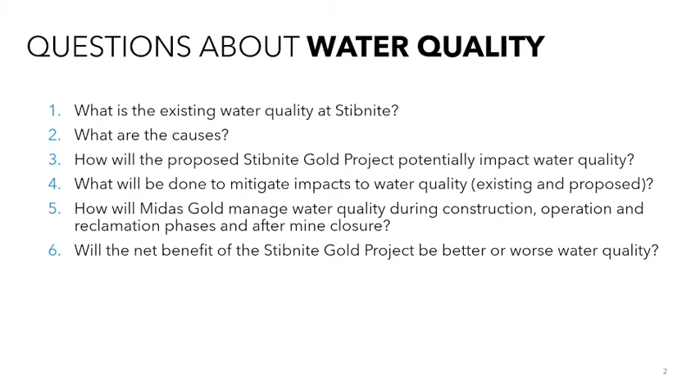We'll have some good illustrations to demonstrate those concepts. And then we'll speak a little bit to the net benefits of the Stibnite Gold Project. Again, some of these data are still being worked on and being updated. But we very definitely have some goals with regard to improving water quality at Stibnite.

So I've spoken a little bit to this, but I'll just buzz through these agenda items. I'm just going to do a very brief intro, and then Austin will talk about baseline surface and groundwater quality, and then speak to the geochemical characterization, how we've prepared or gathered data for these predictive models that estimate what our water quality may be during various phases of the Stibnite Gold Project, and how we've come to those conclusions.

And we'll also speak about water management objectives. This will get into Doug's portion of the presentation. We very definitely want to protect and improve water quality during all phases of the mine, and in post closure.

So there are various topics that Doug will speak to about water treatment, and how we arrived at the proposed water treatment approach included in the draft EIS. This is a water treatment and water management concept applicable to all alternatives. You'll note that in the draft EIS, water treatment is associated with alternative 2, the Mod Pro, the refined pro. But these concepts are applicable to all alternatives in the draft EIS, although they were not applied in that document, but they do have the potential to be.

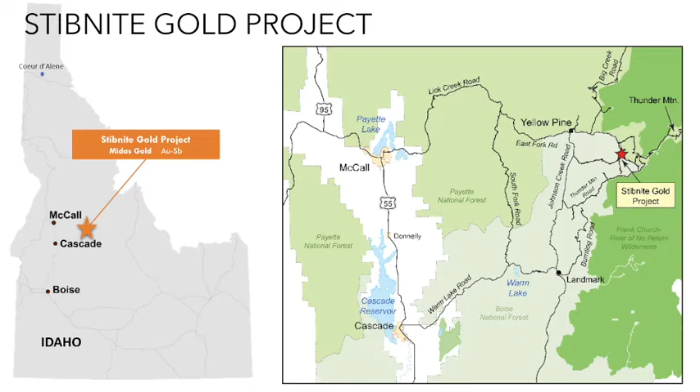It's been the location of a lot of activity, and there's still a sizable resource there that is the target of the Stibnite Gold Project. So that's our general location.

The initial plan of operations, or the plan of restoration and operations - because it has so many components of reclamation and ecological restoration, hence the name - was submitted back in September of 2016.

As you may recall, there was a modification of the proposed action submitted in May of 2019, the Mod Pro, included in the draft EIS as alternative 2. The Pro was also included as alternative 1, but the Mod Pro was very much a refinement to the Pro, with reduced environmental impacts, etc.

But what we did want to maintain with that Mod Pro, even though it was a refinement of the Pro, is all of the restoration objectives included in the original Pro, including restoring salmon migration into the upper east fork of the south fork of the Salmon River. You'll see the blockage in the photo on the cover of the Pro here, the Yellow Pine Pit Lake and the cascade coming into its upgradient edge, which has served as a blockage to anadromous fish passage since 1938.

And of course, there's also socioeconomic benefits to the Stibnite Gold Project - a lot of jobs for Idahoans. One of the mineral resources at Stibnite is antimony, the namesake of Stibnite, the mineral that contains antimony. It is a critical mineral, one that we're very import reliant on. So this would be the only domestically mined source of antimony in the United States.

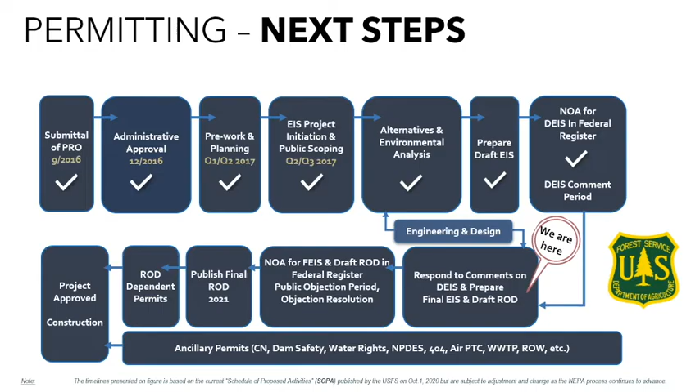So with that, we're going to transition here to Austin and his discussion about water quality. So Austin, take it away.

Thanks for that lead in, Dale. That's a good overview. I'm going to be talking today about water quality, geochemistry and geochemical characterization, as well as existing water quality on site and some of the things influencing that, including naturally occurring mineralization and legacy mining activities.

We have a slide here to get us kicked off - acid rock drainage. Acid rock drainage is a big issue of concern for a lot of hard rock mining projects, and this is associated with dissolution of sulfide minerals, which create acid, and these things tend to accelerate the release of metals into surface and groundwaters.

Now, we don't really think that this is going to be an issue at Stibnite, and I'll be presenting some data that speaks to that a little bit later on. A key takeaway here is that even after almost 100 years of mining activities on site, there's really very little evidence for acid rock drainage occurring on the site.

In terms of water quality today on site, Midas has an extensive baseline groundwater and surface water monitoring program that's been going on since 2011. It consists of a suite of over 40 surface sites and 30 groundwater wells, which were initially sampled monthly and have subsequently been sampled quarterly for a number of years.

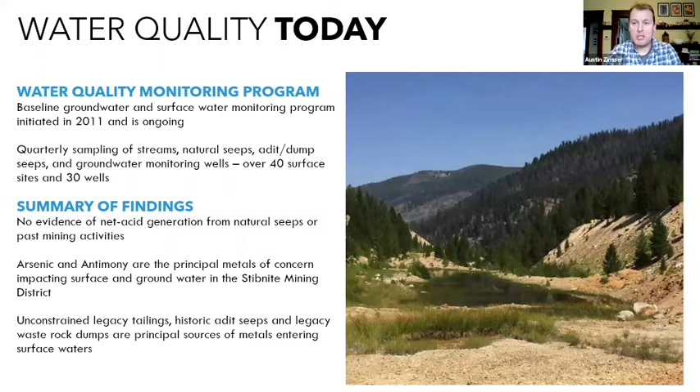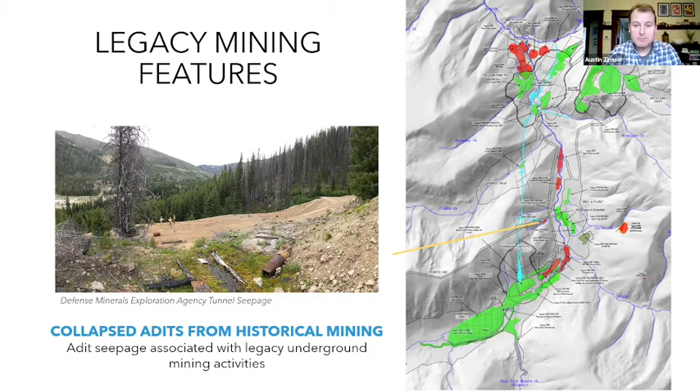We have historical adits such as the Defense Minerals Exploration Agency Tunnel, which there's a picture of on the left, and there's seepage from that adit which is potentially impacting surface water quality. And then there's also, if we can go to the next slide please,

other larger features such as this photo of the historical Bradley tailings, which were unconstrained mill tailings placed in Upper Meadow Creek Valley, which were subsequently covered with spent heap leach ore from 1970s and 1980s gold mining operations. You can see that material being covered in the historical photo. This is the large green area on the map.

Sorry, I have a cat.

But this is just an example of some of the larger legacy mining features that are known to impact surface water quality on the site.

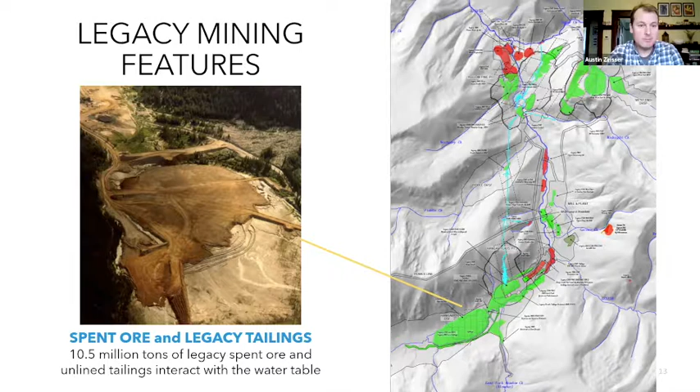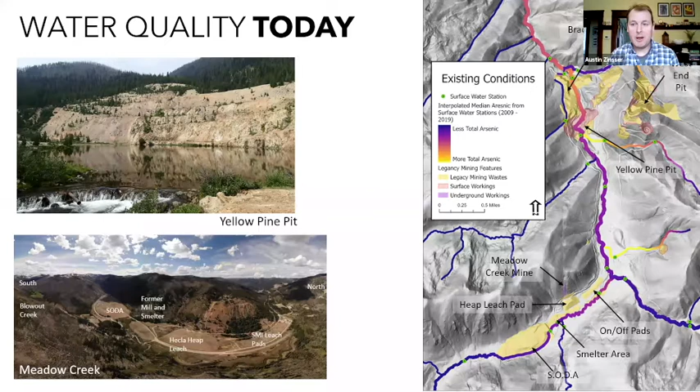Moving farther to the north, where Meadow Creek joins the East Fork, South Fork, Salmon River. The Salmon River flows through the Yellow Pine Pit, pictured in the upper left-hand corner, a historical open pit mine left from 1940s mining operations. And then down to the confluence with Sugar Creek as the river flows north and leaves the Stibnite mining district. But we're going to be looking at some graphs showing water quality of key constituents as the river flows past these legacy features.

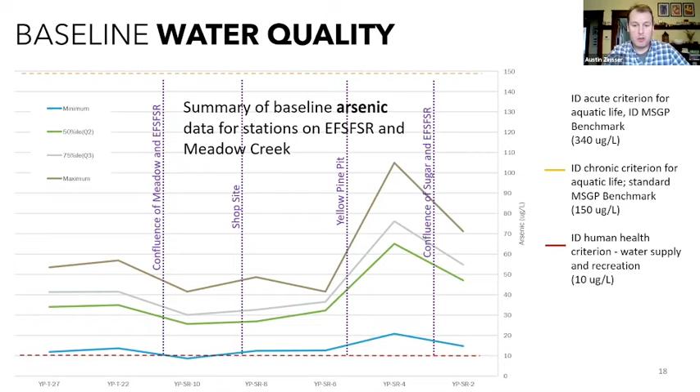There we go, a similar overall plot for antimony. We can see that higher up in the drainage, median concentrations are below the human health criteria, but they rapidly increase to exceed that as Meadow Creek flows past some of the historical mining piles, and increase steadily downstream until the confluence with Sugar Creek in the East Fork.

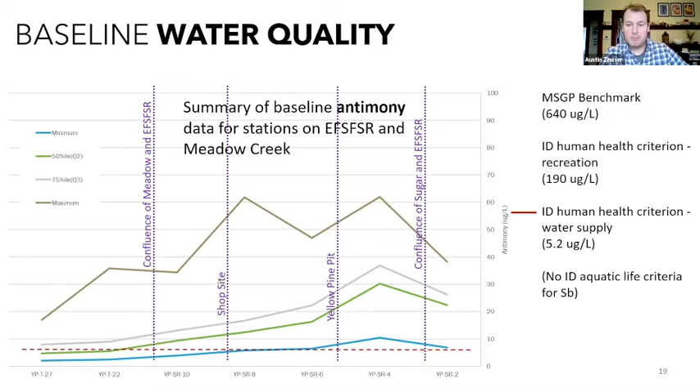The next plot shows mercury concentrations, which behave somewhat differently. Mercury generally remains below the chronic criteria for aquatic life throughout the area of the Stibnite mining district, but does increase during some periods below the confluence with Sugar Creek, and that's due to Sugar Creek draining the historical Cinnabar Mercury mining district and introducing that constituent into the surface water.

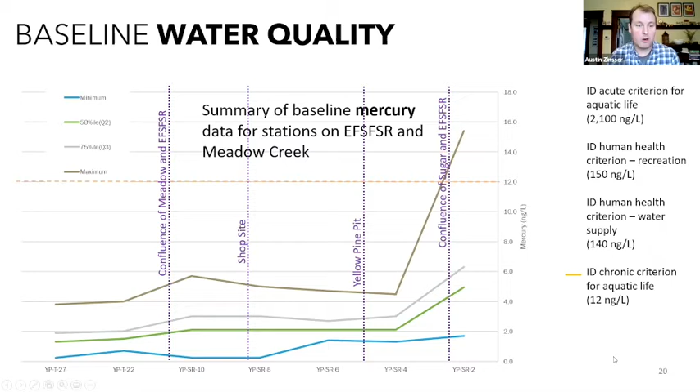So I've talked about some of the legacy mining features and how those impact surface water quality.

But another key component here is that there's a lot of naturally occurring mineralization in the Stibnite mining district. We have the three known mineral deposits targeted in the Stibnite Gold Project, but there's also a lot of other areas of elevated arsenic and antimony occurring in the district. That's displayed on this map, derived from soil, rock, and silt samples collected for exploration purposes, color-coded by arsenic concentrations. You can see that elevated arsenic occurs throughout a large portion of the district, primarily on the east side of the Meadow Creek Fault, which runs right through the Hangar Flats and Yellow Pine deposits.

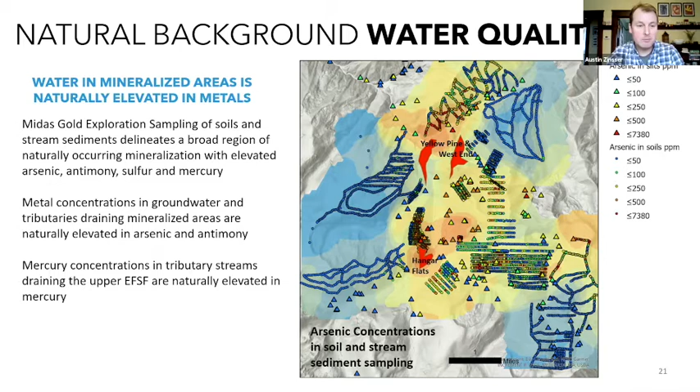So water concentrations draining mineralized areas are naturally elevated in metals. This slide shows information from a characterization study prepared for IDEQ back in the 2000s, which estimated what natural background conditions are in groundwater and seepage from mineralized areas. You can see that arsenic is for the most part consistently elevated above the human health criteria, and antimony is elevated in seepage from mineralized areas.

So both legacy mining features and naturally occurring mineralization are leading to degraded water quality in the Stibnite mining district.

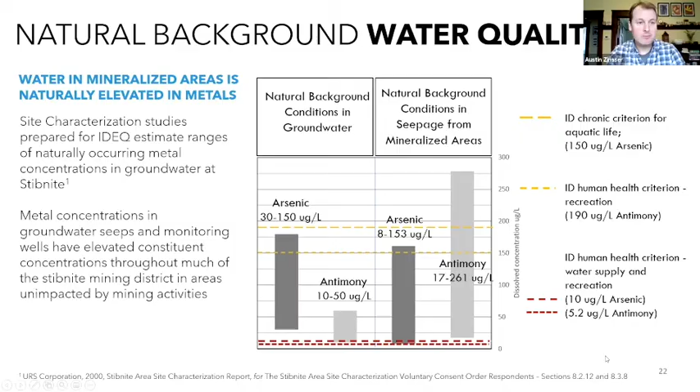So I'm going to switch gears here and talk a little bit about the geochemical characterization program and some of the work that's been done to support predictive modeling of what water quality might look like due to mining activities.

The geochemical characterization study was work being done by SRK Consulting out of Reno. I've been working with them for a number of years on sample selection and making sure samples are representative of all of the different types of geological materials we have on site.

Some of the sampling included samples of ore and development rock, as well as legacy mining wastes, material that's going to be representative of the mill process material, and then also additional samples as needed.

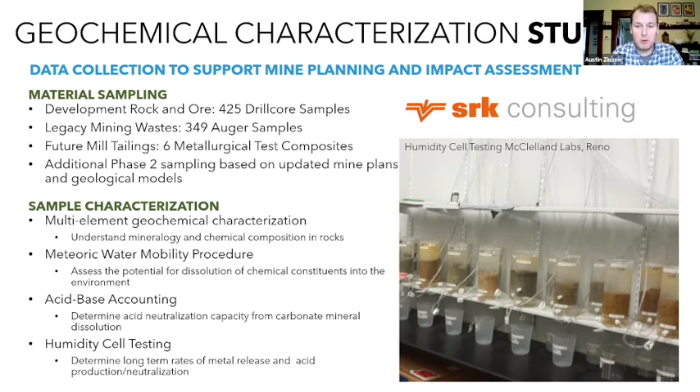The general characterization consisted of multi-element geochemical characterization to know what constituents are in our geological materials, and then some short-term leaching tests, acid-base accounting to figure out if the samples are potentially going to generate acid rock drainage or not, and also humidity cell testing, which looks at long-term dissolution rates and long-term release rates.

Basically weekly, these cells are exposed to alternating cycles of moist and dry air in order to mimic and accelerate natural weathering processes that we might expect if these materials were mined and placed in development rock storage facilities.

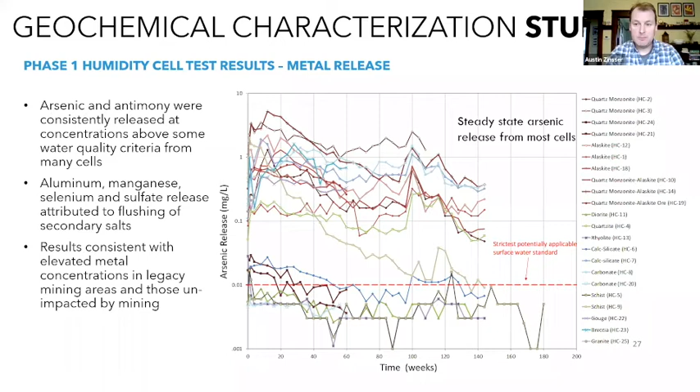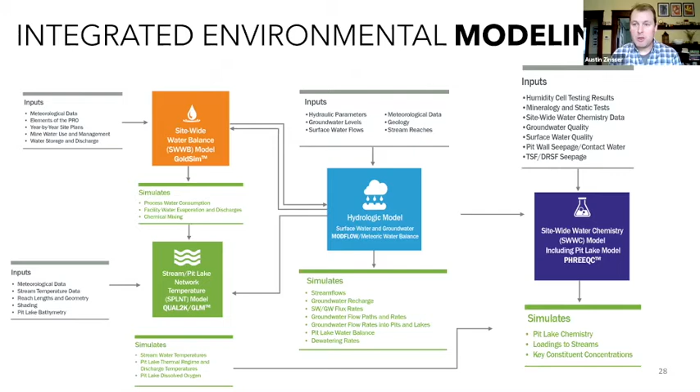And I think at this point, I'm going to hand it over to Doug, who's going to talk about management strategies.

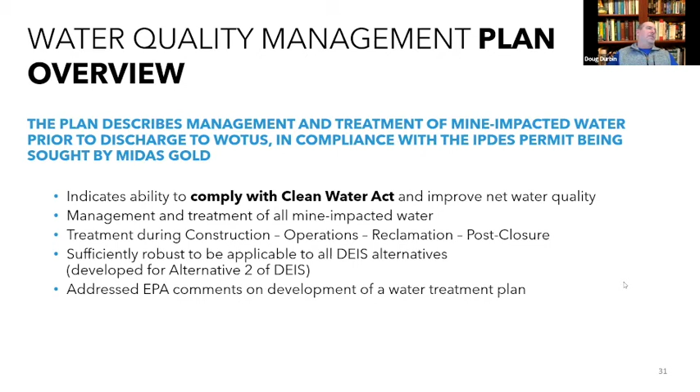So the big picture objectives of water management would be to protect the surface and groundwater quality during operations, and of course during the construction phase before that, and reclamation afterwards. The big picture long term is to make sure that 50 years, 100 years from now, the water quality associated with the site will be demonstrably better than it is today. That's part of the commitment from the project.

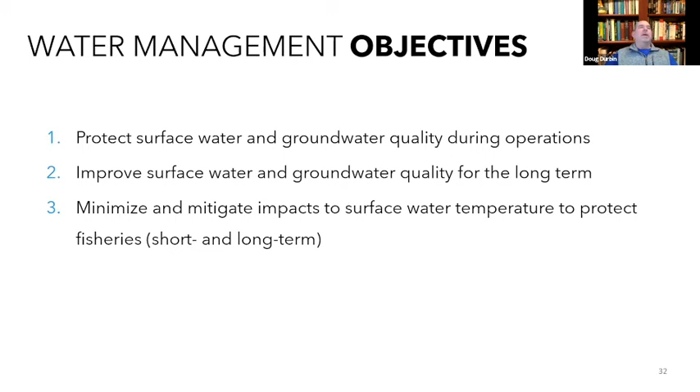And then in addition to that, if we think just beyond water chemistry, there's also been a lot of work done to look at how to make sure that we don't have negative impacts on stream temperatures, because there are so many species that depend on particular temperature regimes, including some listed species. And so in addition to worrying about things like arsenic or antimony or mercury, we're looking at water temperature, a more physical parameter, and making sure that we're also taking care of that.

As I said, it's a holistic or a comprehensive view. The three big picture pieces that we talk about are avoiding impacts whenever we can. There are steps taken to make sure that we don't touch any water we don't need to touch, for example. And then minimizing impacts so that if we do have some intersect with water at a portion of the site, we try to make that as minimal as possible, as little change as possible from natural conditions.

And that's a very important principle that means that as things go on, there will be changes or unexpected events. Some might be natural events. Others might be changes in a mine plan or a schedule. And we want to make sure that whatever we do to manage water is absolutely adapted through those changes in the future so that we always do a better job as time goes on rather than falling behind.

So in terms of an overview, this is a generalized graphic, but a couple of the things that we do that are really important are to make sure that we keep the clean water clean.

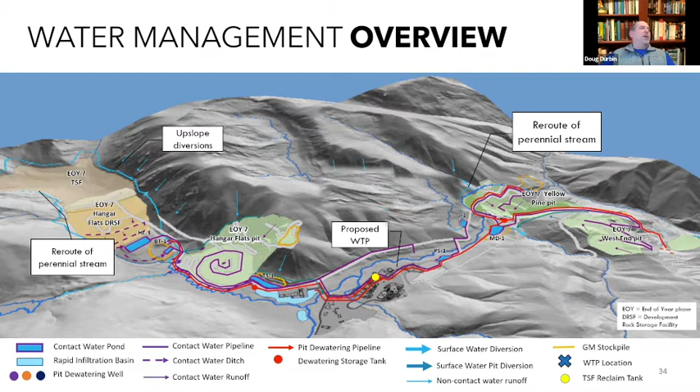Another thing you can see on this graphic are some of the darker blue or turquoise ponds. We have strategically located a series of ponds across the site, and that's where we catch the water that does come in contact with mine materials, so that it doesn't discharge into surface waters before it is either given a chance to be reused or, if necessary, treated to make sure it is clean enough to be discharged to surface waters. So rerouting water we don't touch and containing or managing water we do touch are two of the biggest picture pieces of water management for us.

Here's a zoom in. This is the tailing storage facility, and you can again see those run-on diversions so that water coming down the side of the hill doesn't make it all the way to the top of the facility. It's caught by a reroute, in some cases of an intermittent stream, and in some cases a perennial stream.

Another feature here at the bottom is an underdrain. In some cases, we want to make sure that the groundwater coming down through a valley or down a slope doesn't get intercepted by a feature. So instead, we create conveyances to move that groundwater from above the feature to below it without coming in contact with the feature. In other words, moving clean water around or under something is a good way that we keep our clean water clean.

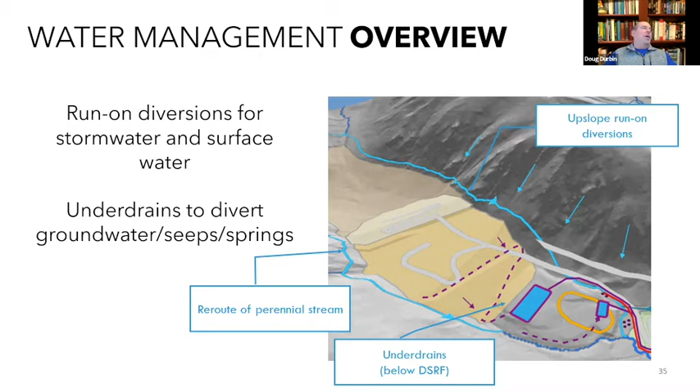During construction, the earliest phase of the mine life, we start to build all of those diversions. In addition, we look at other activities that will improve water quality. Toward the middle of the figure, you see SODA removal, and then the pre-stripping of the Hecla heap. Those activities are taking out legacy materials known to contribute arsenic, antimony, and other things to the surface waters. By removing those before mining ever starts, we've actually begun to improve water quality for the site overall.

There's a section of Meadow Creek that has been rerouted at one point. That will be rerouted again to allow for a mining pit, but that next reroute will be permanent, and we'll have a lot of habitat components put in there because that stretch of the creek serves as good habitat for several different fish species.

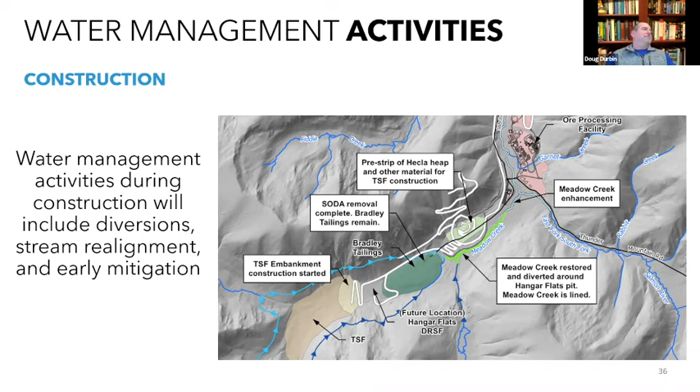The next phase is operations, the mining portion of the mine life. We continue to divert that clean water around the mine facilities, and we make sure we're reusing as much water as possible for the water we touch—water pumped out of a mine pit to keep it dry, or water that may come in contact with development rock or a storage pile of ore. Water falling on the mine processing facility will be captured, stored, and reused whenever possible. In the event there's excess water, it can be treated and released.

Finally, during the reclamation phase, things are being cleaned up and covered so that surfaces that might contaminate water are not coming in contact with it. A big focus of this period is dewatering the tailing storage facility, which will then have a cover put over the top of it. There will be reestablishment of some of those streams—in other words, the diversions of most streams are not permanent; they're put back into a location more like their original geographic positioning. We also manage any inflows and outflows of open pits until they're either backfilled or otherwise decommissioned.

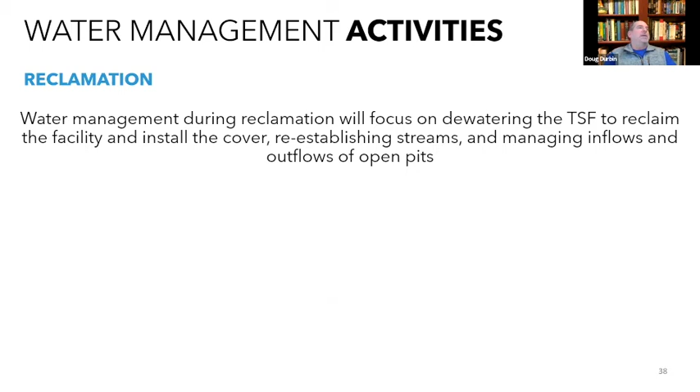All right, a key feature that I've talked about a couple of times of water management is treating the water. This is what would be done before water is discharged back to surface waters for any of what we're calling the mine impacted water.

The treatment plan has been put together, and it can be adaptively managed to fit any situation that may come along. The primary facet is to comply with the Clean Water Act, meeting state water quality standards and seeking to avoid impacts to surface waters. So the discharges made under the permit issued for this mine would make sure that no discharges would exceed the permit limits.

That permit will be issued by the state of Idaho. It's called an IPDES permit. It'll have numeric limits for a number of parameters that I'll talk about in a minute, and our goal is to ensure that we never exceed those limits.

The performance and effectiveness are demonstrated in the water treatment plan that's been put together. It's put together using engineering principles, and we know the concentrations, volumes, and timing of the water. So we make sure that the treatment system in place is adequate to handle any water that comes at it from whichever source it may originate.

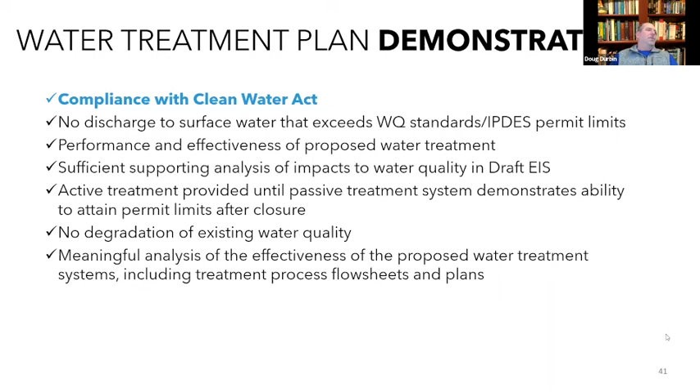As I said, the treatment system would be adaptable and scalable through the entire mine life. An important thing to know is that the plan is not to discharge any of the actual industrial wastewater. By that, I mean any water that is part of the mine or processing loop, water that goes into the tailing storage facility or comes back out of it. That water would be in a closed loop such that none of it would need to be discharged at any time during the mine life.

The only time water like that may need to be discharged is during closure of the tailing storage facility, when there will be water that accumulates at the surface of the tailings, and that could be slowly decanted off and treated for discharge as needed, although even that would be minimized under the plan that has been developed.

One thing that's important to understand is there's a lot of seasonal variability out there. Most of the water is associated with the spring snowmelt, so there's a big peak in stream flows. Most of the rest of the year, approximately 8 or 9 months, there's actually minimal flow that comes through most of those smaller tributaries, and associated runoff is also very small. The storage ponds and the treatment plant are all interconnected.

There's a whole spider web of pipes and pumps that link things together so that we can take advantage of storage potential in one area when we have little storage in another area, and we can move the water back and forth so that ideally we keep it until we need to use it for the treatment plant or the ore processing plant, and don't need to treat it and discharge it.

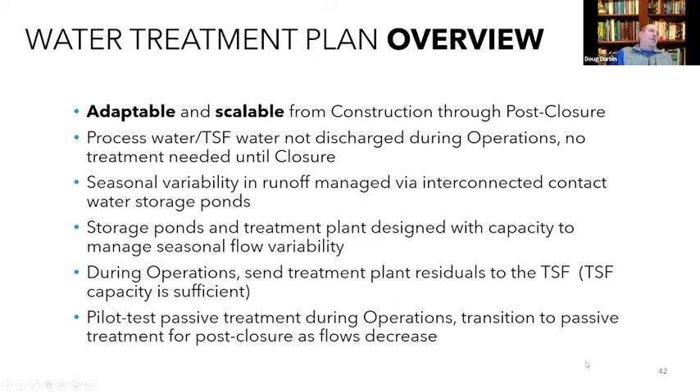So overall, the process of developing the water treatment plan is that endless loop that you see there. The plan gets put together, you do some testing to see how it would work for your site at a bench scale or sort of a laboratory scale. You review the results, make any changes that you need to make, and then eventually you put together the pilot scale tests for on-site treatment and evaluate those, and finally design the actual plant and put it into operation.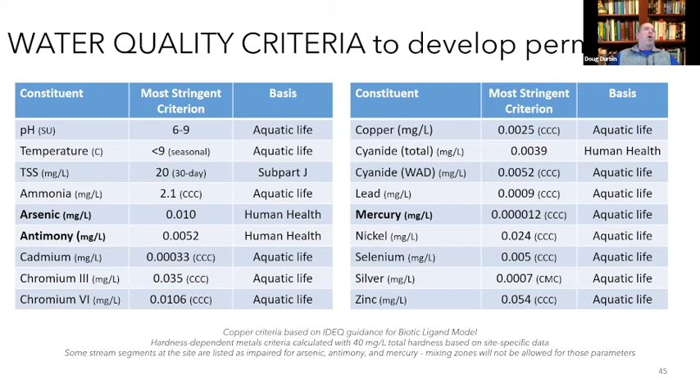Others have particularly low concentrations in the Idaho water quality criteria, things like copper. It is of concern because its criteria recently changed. And so we'll be looking at a much broader swath of parameters in thinking about permit limits than just the ones that have already been identified as problematic on the site.

And again, just an overview here, there are really two different treatment needs on the site. The primary one is associated with the water that will be at the mine itself, and we're calling that mine impacted water. That's what I've talked about so far in all of my comments today. Any water that needs to be released would be treated at a wastewater treatment facility and then discharged at an outfall, likely on the East Fork, South Fork of the Salmon River, close to where the ore processing facility is.

There may be a supplemental or additional outfall at a point on the lower portion of Meadow Creek. That would be in place to allow us to augment some flows in Meadow Creek, because as I said, that tends to be good habitat for several salmonids. And so it allows us to use this really high quality treated water as a habitat enhancement for some of the fish.

For example, the first 2 or 3 years of mining, there wouldn't be enough water to exceed the demands of the plant. And so all the water that is touched by mining activities would be reused in other mining processes. So there would be no need to discharge that water.

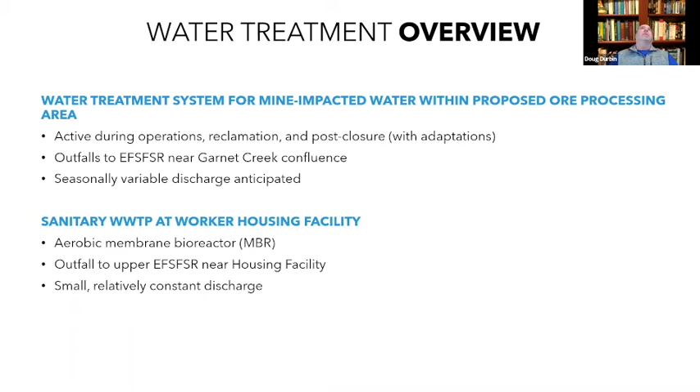The other treatment is almost a minor thing: there will be a worker housing facility at the site that will produce a small, rather constant flow of water associated with cleaning, showering, and cooking. That would have its own treatment facility, a very conventional, off-the-shelf kind of treatment that's highly reliable, discharging to the upper East Fork, South Fork, just adjacent to the housing facility. As I recall, it would contribute something like 2% of the flow of the stream at that point.

So in summary, we're going to comply with the Clean Water Act. We have put together the treatment technology with the best scientific and engineering practices available. We're focused on ensuring that mine-impacted water would only be discharged if it meets the permit limits, and if we can't find another use for it, and that we won't degrade the ambient conditions. This occupies the entire span from beginning of construction through post-closure, and the technologies we're looking at are all proven at other sites, including other mine sites. So we're not inventing some new mousetrap here. We're using things that are known to work, and we make sure we're able to adapt it to any of the alternatives or any evolution of the mine as the mine life goes on.

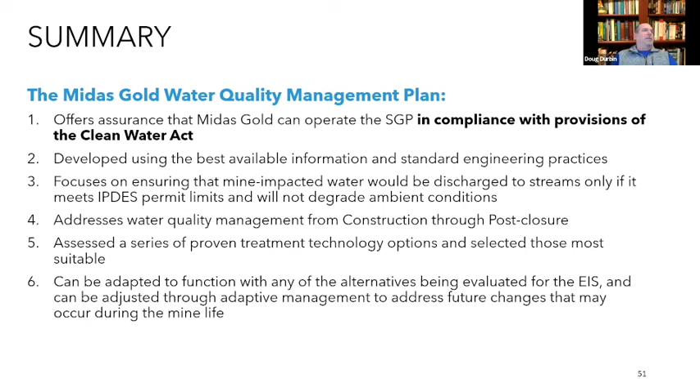I believe that's the end of my information. Now I think I'm going to throw it back to Austin here to talk about a new acronym that we have.

Just about two weeks ago, Midas Gold, the U.S. Forest Service, and the Environmental Protection Agency entered into an ASAOC, which is an Administrative Settlement Agreement and Order on Consent for Removal Actions. The acronym is much easier to say. Basically, this directs Midas Gold to perform cleanup of some of the legacy mining materials on site over the span of approximately four years, and it also provides liability coverage should the project be permitted and move forward into construction and development.